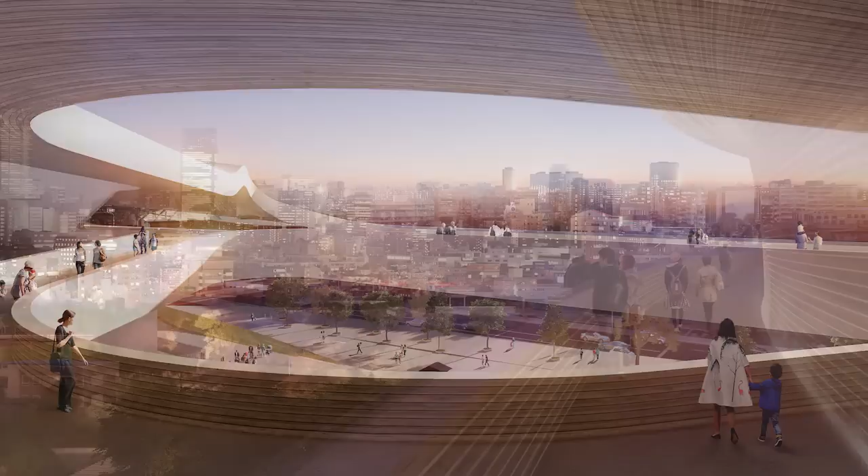One of the first shows we had done was in Japan 30 years ago. I think the stadium project is a very important project for Tokyo because that was done as an international competition, which we won. It was a very serious team of engineers and architects who looked at this project for 2-3 years, so it's an enormous investment.

I think it's a very important project because it has a life beyond the Olympics. It has a legacy life. The team is a credible mix of international architects with sports planning and Japanese experience.

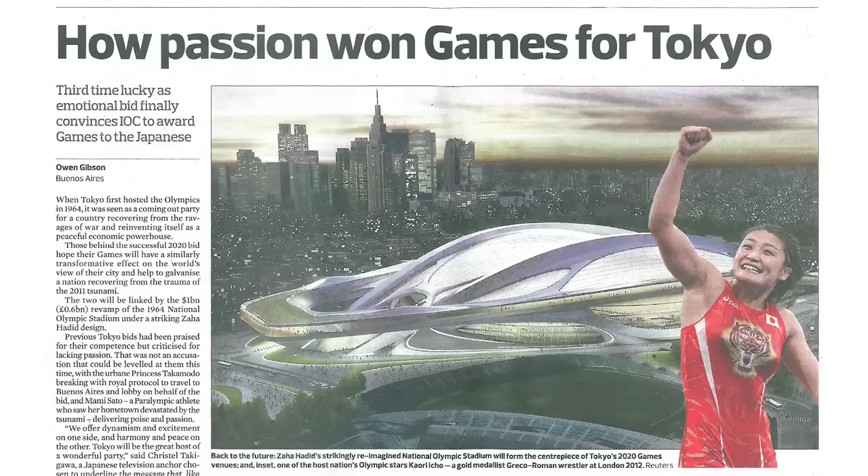Zaha Hadid Architects with Arup Sport won the international competition to design the new national stadium for Tokyo 2020 Olympic Games. ZHA have experience in working successfully with clients to design projects which have been built on time and to budget.

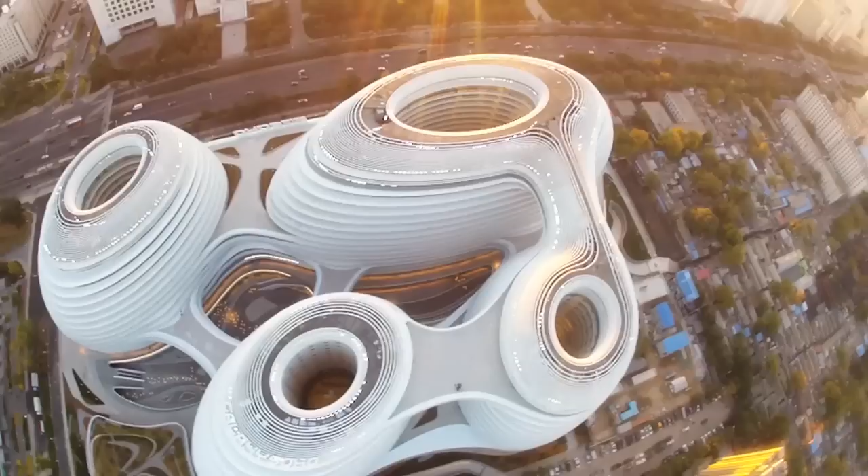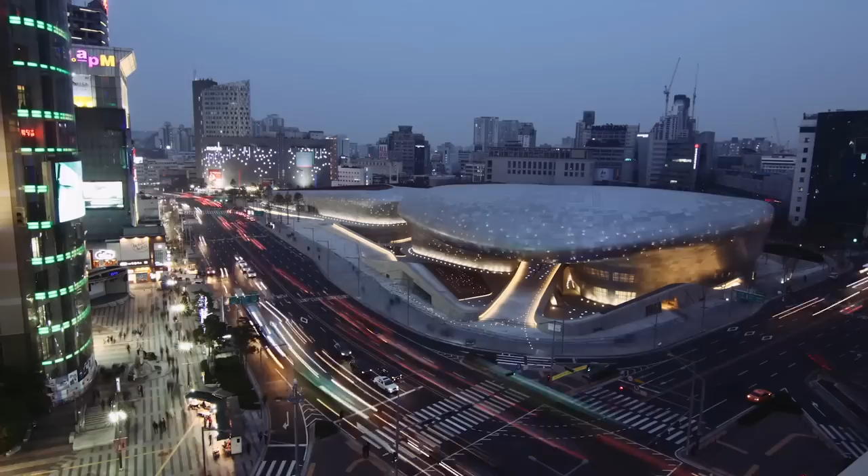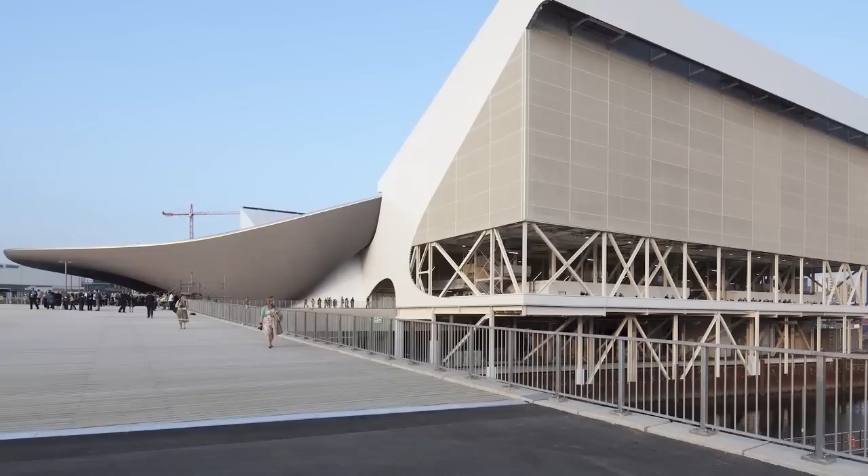ZHA designed the London Aquatic Centre for the London 2012 Olympic Games. The project was successfully redesigned to achieve a revised budget. The design used a mix of temporary and permanent seating to become one of the most successful venues of the London 2012 Olympic Games. The venue has since become very popular and well used by the public.

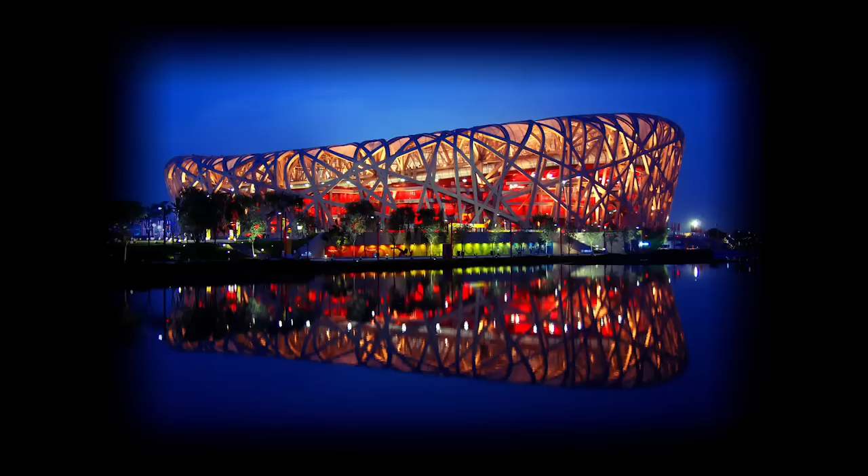Arup Sport have extensive stadium design experience, from the new multi-purpose stadium in Singapore's Sports Hub to the Beijing Olympic Stadium in 2008, the Allianz Arena 2006, and the City of Manchester Stadium 2002. We have been collaborating on the design with 4 of the largest design consultants in Japan, led by Nikken Sekkei. Between them, these Japanese offices have designed 3 of the stadiums for the FIFA 2002 World Cup in Japan.

The design was inspired by the past and future of Japan. The site is the site of the Tokyo 1964 Olympic Stadium, and it's an appropriate place to build a new national stadium which aspires to create a building which exceeds mere function to become a symbol of Japan's renewal and long-term optimism for the future.

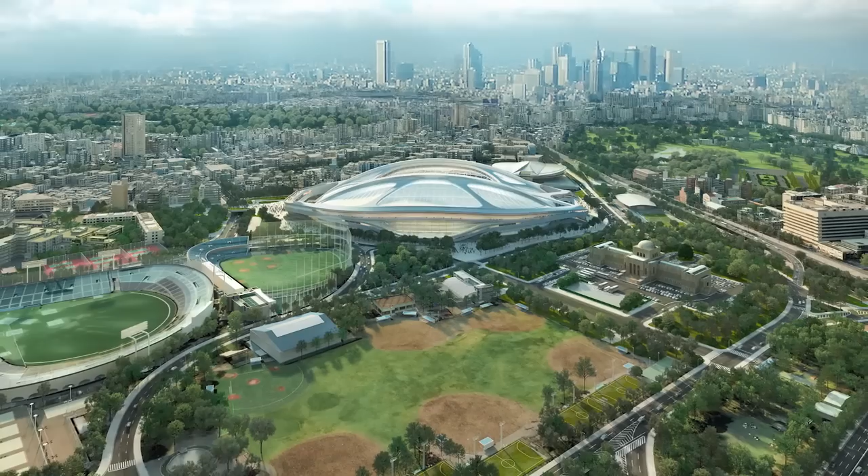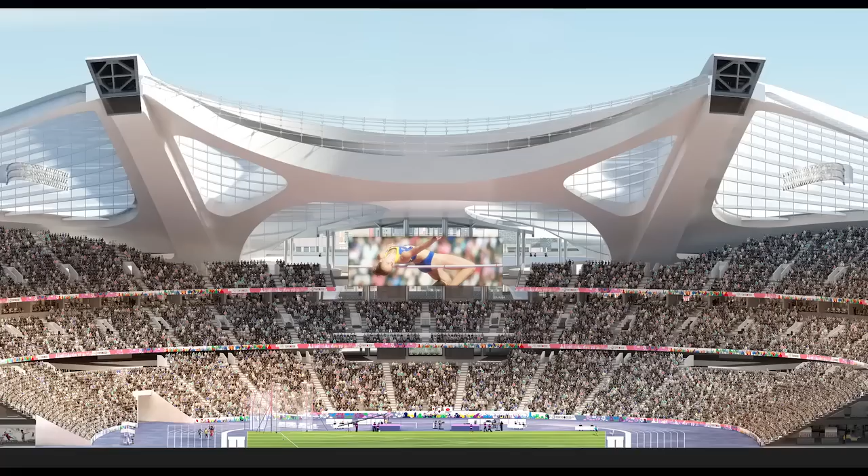The basic components of stadium design are extrapolated to connect the stadium to a specific context of Gaien and beyond, to Japanese culture, as an expressive but efficient design. The design is derived from the articulation of structure and circulation, where structure is required to create roof cover over long spans without columns, and a lot of circulation is required to safely move 80,000 people in and out of the stadium.

Proposed for practical reasons, the primary structure of 2 keel arches have a similar intent in silhouette and symbolism to traditional Japanese landscape bridges, so that the new stadium is based on a key motif from traditional Japanese landscape design, and an appropriate addition to the sports landscape of the Gaien area.

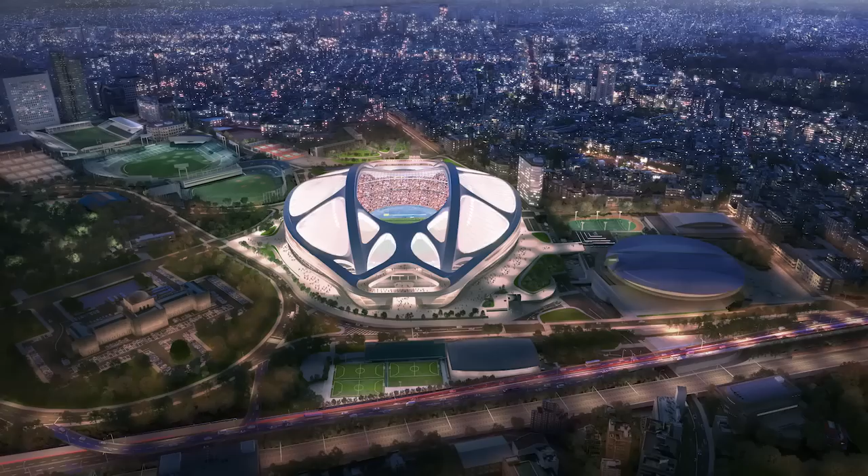With cross ties, nature is further embodied in the design, where the expressed structure creates a distinctive flower petal geometry, so familiar in nature and to the Japanese public who have a close affinity to nature and the passing of the seasons. The flower petal geometry of the roof is continued into the facade, where the structure is not only expressed but inhabited.

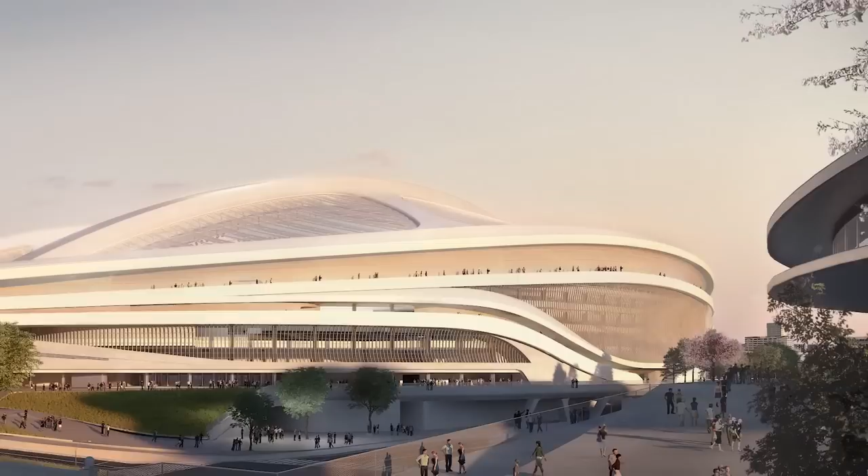A series of diagonal stairways and elevated walkways are developed into the envelope of the stadium, so that it functions as a stadium on event days, and every other day it's an extension of the pedestrian landscape of the Gaien area, allowing extended walks and elevated views over Tokyo.

All of these public walkways are lined with Japanese timber, giving a tactile familiarity to the stadium which ties it back to the fundamental material of the Japanese environment and experience.

The majority of facade is broken down by the petal geometry and clad in Japanese timber louvers, so that the overall effect at pedestrian level is a subtle interplay of Japanese timber cladding, giving the visitor the experience of a direct resonance to the tree-lined landscape of Gaien and Japanese culture.

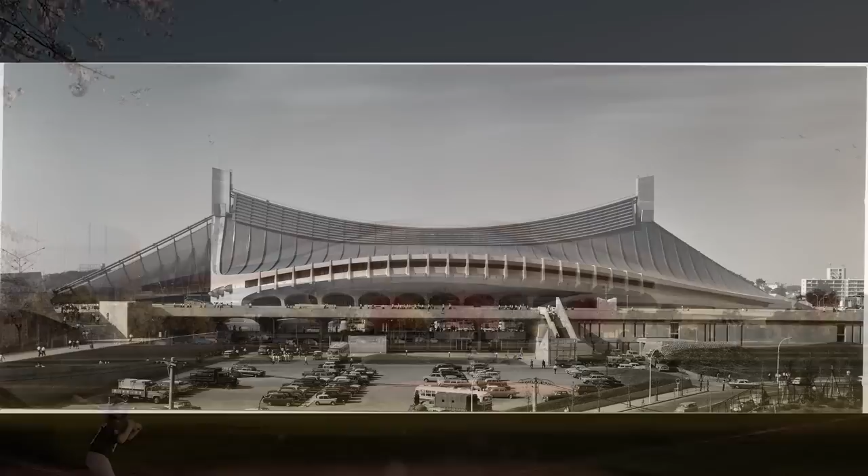The majority of the roof structure is provided by catenary beams, which resonate with the innovation by Kenzo Tange with his catenary beams for the Yoyogi National Gymnasium. We aspired to make the new stadium connect visually and symbolically with this Japanese icon of optimism, so that Tokyo 2020 leaves Tokyo with a stadium as well conceived and as beautiful as this gymnasium from Tokyo 1964.

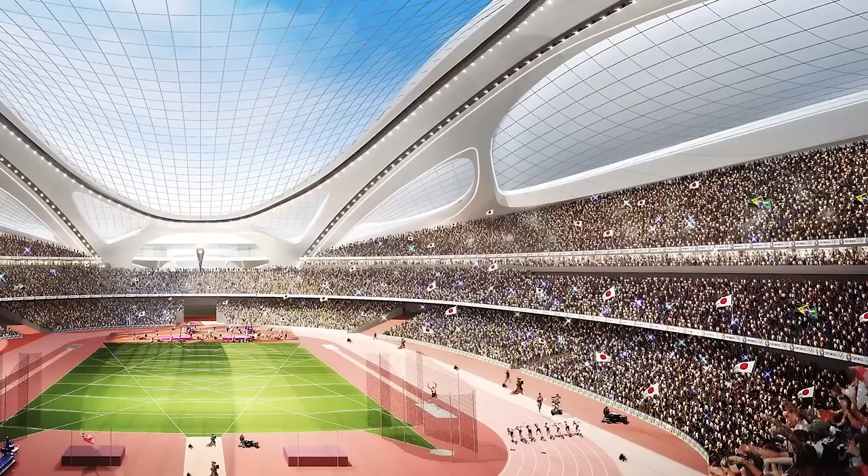The roof is covered in transparent, lightweight fabric. The roof allows daylight in, allowing good turf growth, whilst allowing spectators to experience the pleasure of daylight as they watch the events. At night, the stadium will glow and take on the appearance of a Japanese lantern.

Together, the arches, catenary beams, and lightweight fabric combine to create an overall effect that represents the traditional craft and modernist innovation of Japan, creating a renewal of the Japanese spirit of optimism for the future, based on confidence in their past.

Our new national stadium design has been 2 years in the making, and it is ready to start on site this year. It can be ready for the Rugby World Cup of 2019 and the test events before the Summer Olympics of Tokyo 2020.

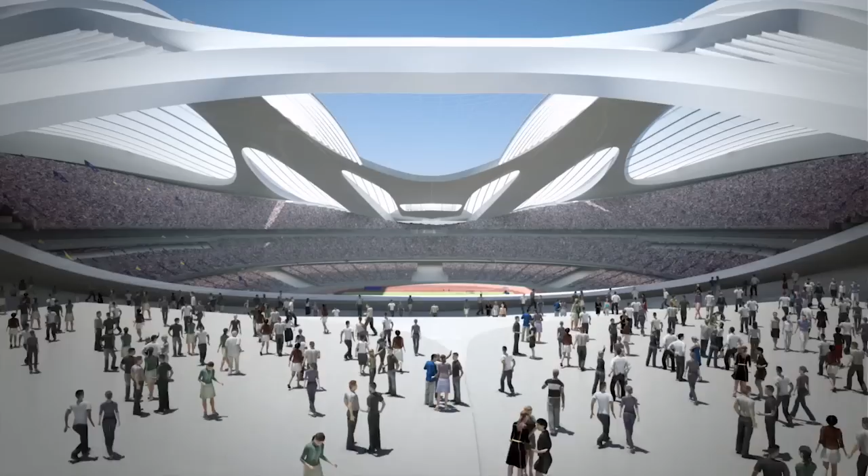To start the design from scratch is an unnecessary risk which we think the government should reconsider, if its aim is to achieve a lower price than 252 billion yen. We believe the answer is to introduce more competition between the contractors, but to not lose the benefits of the design.

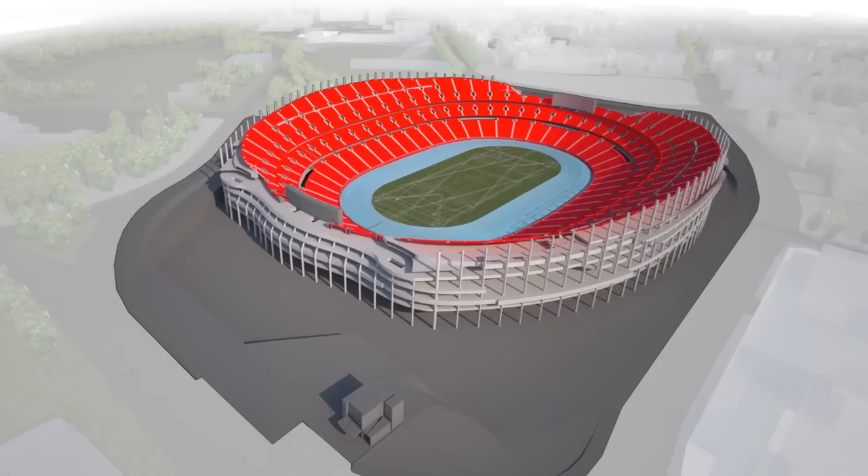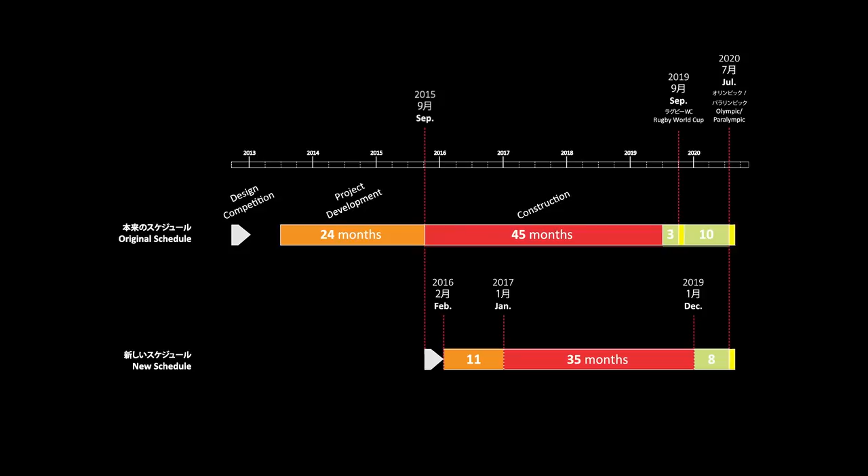The site is complicated, and the majority of the design will remain valid because the basic requirements of seating capacity and support facilities will remain the same. A new process should be used to get a lower price, but it should not waste the design work done to date. A new process will only allow a very short design period, and by the time certainty on design and price is determined, it will be too late. Instead, change the current design now to get certainty on costs.

A new process to find a contractor will result in the same limited number of Japanese bidders that competed for the project last year. Even if the tender is open to international contractors, only one of the 5 large Japanese contractors will be able to qualify or win the bid. We understand that there are only 5 contractors in Japan who will have the necessary stadium experience and size of turnover to qualify to bid for the project.

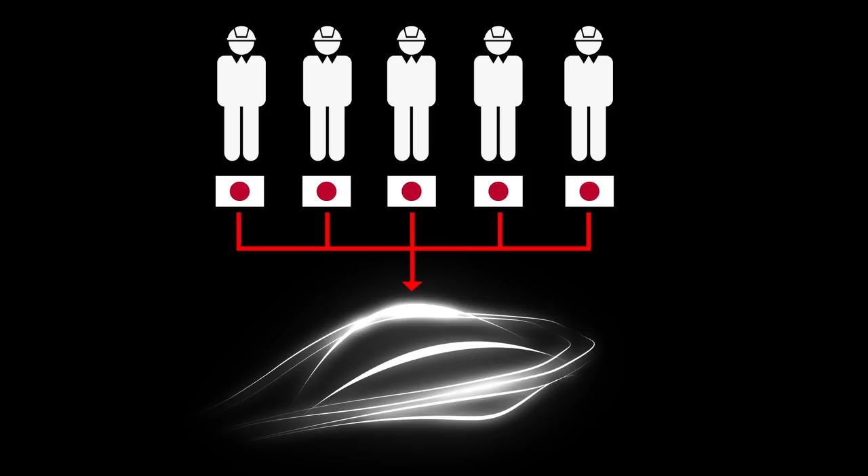2 of these 5 contractors worked on the project and produced the price of 252 billion. There is limited competition available, and this is the underlying issue to be tackled. We think the new process should concentrate on achieving competitive bids based on the existing design with the option to provide cost savings to achieve the project on time and on budget. This way, the design is not wasted and the risk of failure to get value for money is avoided.

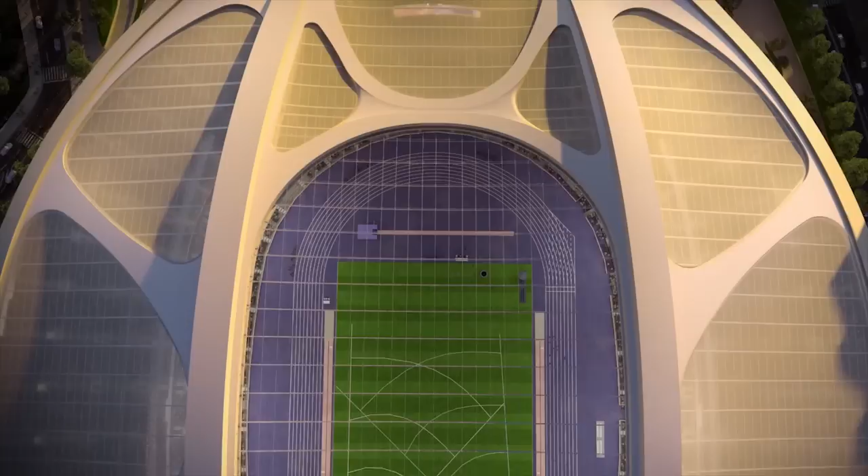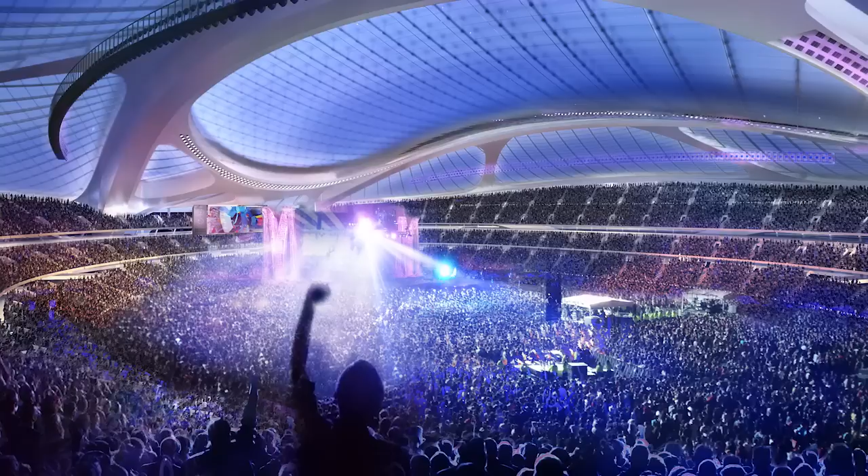The current design is defined by the client's brief, which is an outcome of their legacy business plan, which needs to generate revenue from key stakeholders such as the J-League. For the past 2 years, the client's brief was for a multi-purpose stadium with an adjustable seating bowl which is able to switch sports modes between athletics or football with an operable roof to close the roof opening and allow concerts.

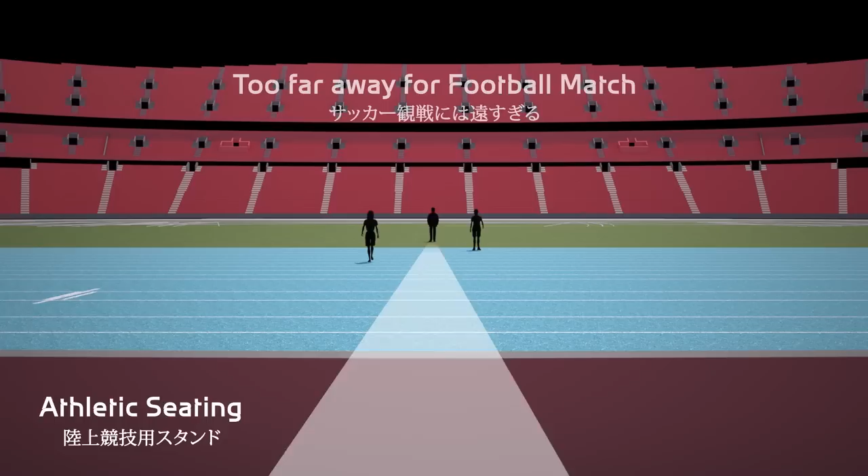If the government decides to change their brief to a fixed athletic seating bowl of 80,000 seats, it will not be sustainable. If football is watched from the distance of an athletic seating arrangement, it's too far away to create atmosphere and it will not be popular. An athletics formatted bowl is not acceptable to FIFA and will not be acceptable to J-League for national football events. To be sustainable, the investment needs to be focused on long-term usage after the Olympics, and that means being able to accommodate football, which will be the largest user and revenue after the 2020 Games.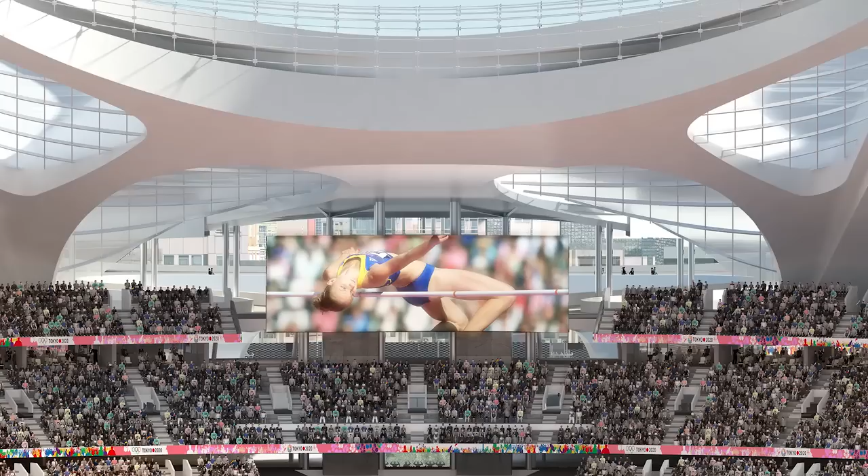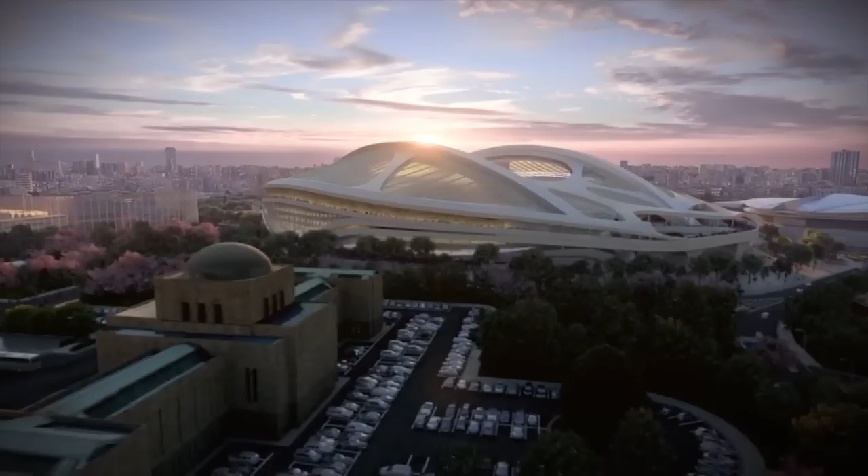There are many options available to achieve this objective, but there are certain key parameters to stadium design which we think need to be understood. To illustrate these parameters, we will use a cross-section of the stadium which encapsulates the basis of stadium design. It's important to understand that the size and volume of stadium enclosure is not only determined by the seating capacity. There are other factors which will need to be incorporated in the new stadium, regardless of its seating capacity. And these factors also determine the size, cost, and sustainability of the stadium.

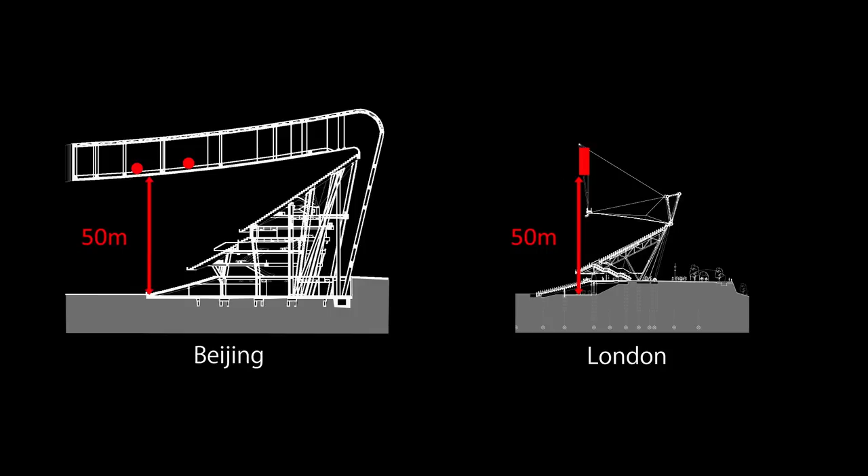To host the Olympic Summer Games, television requires high-definition lighting to be able to broadcast. This requires the stadium to incorporate lighting at a height of 50 meters surrounding the field of play. It's a large field of play with many track and field events occurring in different locations. Each of these events needs to be lit to the same high standard. The lighting also needs to work for football, which is a different and smaller field of play. This requirement means either above or below the roof, an extensive gantry needs to be built at a height all around the field of play. Regardless of seating capacity, this lighting is required.

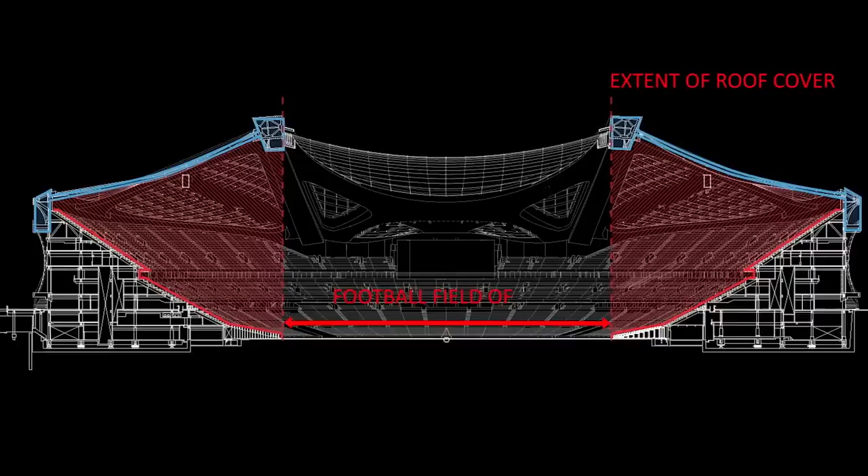The extent of roof cover over the seats is directly related to the amount of seats. Its fundamental purpose is to protect spectators from the weather. In the case of Tokyo 2020 Olympic Games, the weather is hot and humid, so the roof should provide as much solar protection as possible to make the spectators comfortable. If the stadium is to work for football, the extent of roof should be determined to cover all of the seating in football mode. Building a roof once to work for athletics and football will result in the best return on the investment and mean the stadium is sustainable in the long term.

Any stadium will host a limited number of events in any year, and stadiums are difficult to make work as a business. For the new national stadium, it was projected it would only host 40 events, including 10 concerts in any given year. There are potentially 80,000 customers at any event, so it's imperative that the stadium design maximizes the amount of revenue that it makes at each of these events.

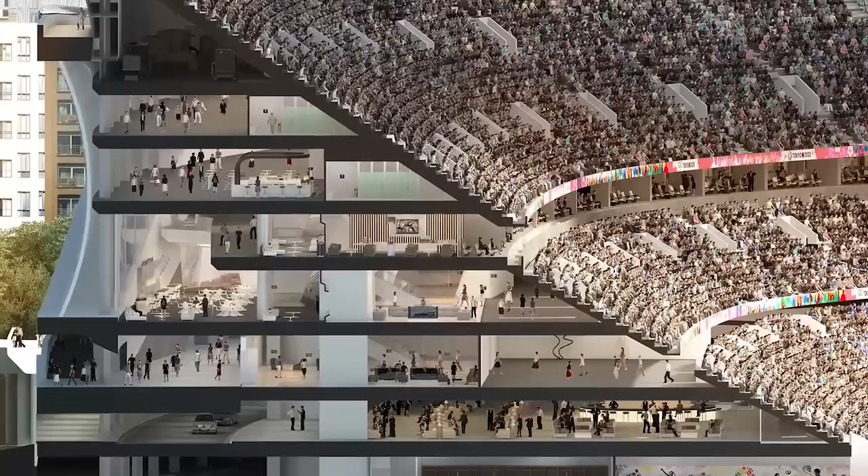In modern stadium design, this means more dining facilities within short travel distances to increase the duration of stay and spend by spectators to any single event. This means that in addition to the fixed seating, there needs to be facilities in close proximity to all seats to ensure revenue is generated. The current design is designed on this basis, and it should be retained to be sustainable not only in terms of usage but also revenue generation.

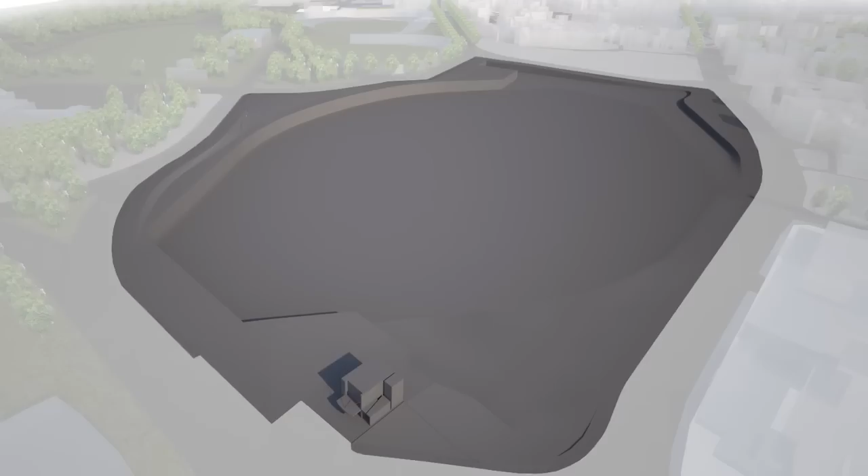The site is a very constrained urban island site, surrounded by roads on all sides with extensive level differences to navigate and height limitations for any development. The complexity of managing to fit the field of play and seating bowl on the site, along with arranging level access in multiple directions, means that there are very few design options available. Our current design is optimized for this particular site.

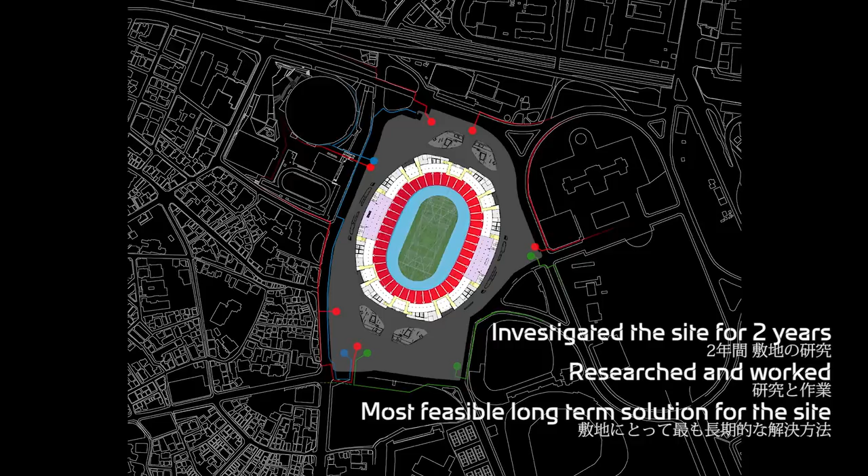Having investigated the site for 2 years, we have researched and worked to produce the most feasible long-term solution for the site. The site area is small, so the design has been optimized to create as much external precinct area available as possible for crowd flows by allowing the non-ticketed concourse inwards to create a compact footprint and safer site for crowd management.

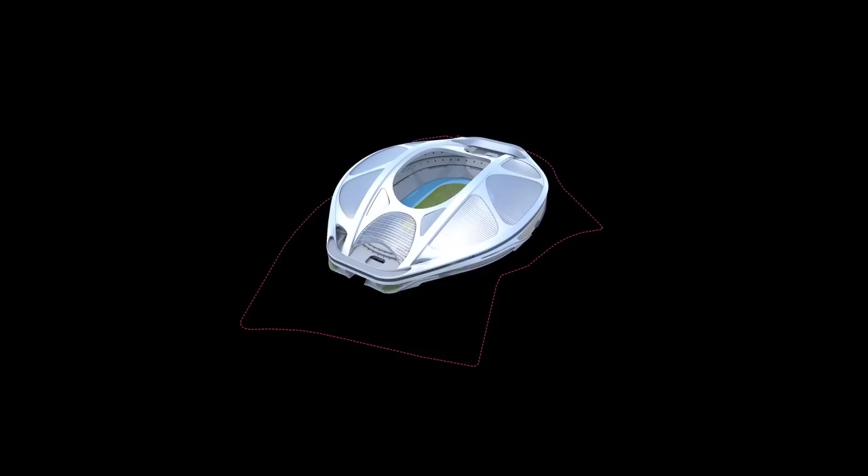We have tested many bowl options, including the use of temporary seating. We proposed an option in 2013 to the client to achieve some of the 80,000 seating capacity by using temporary seats. This option was rejected at the time, as the client's brief was and remained to have 80,000 permanent seats in legacy. We know from direct experience in London 2012 that mixing temporary and permanent seating on a constrained site is difficult, and it is not a way to save costs. It is a valid option if the long-term objective is to achieve a lower permanent seating capacity.

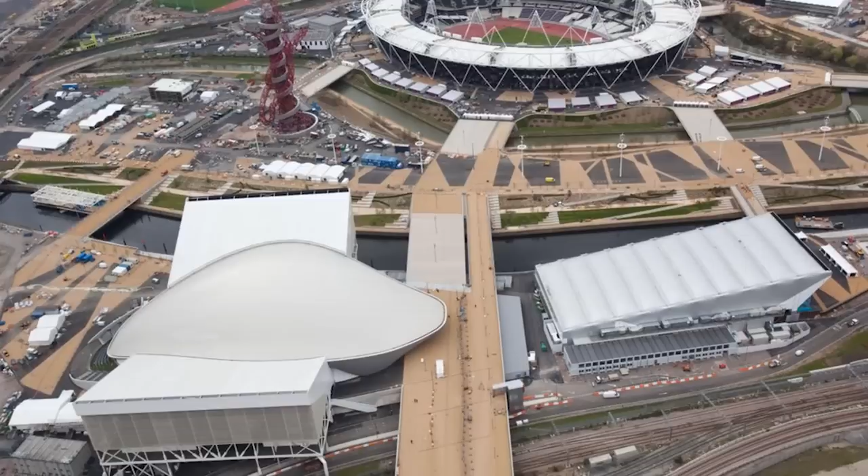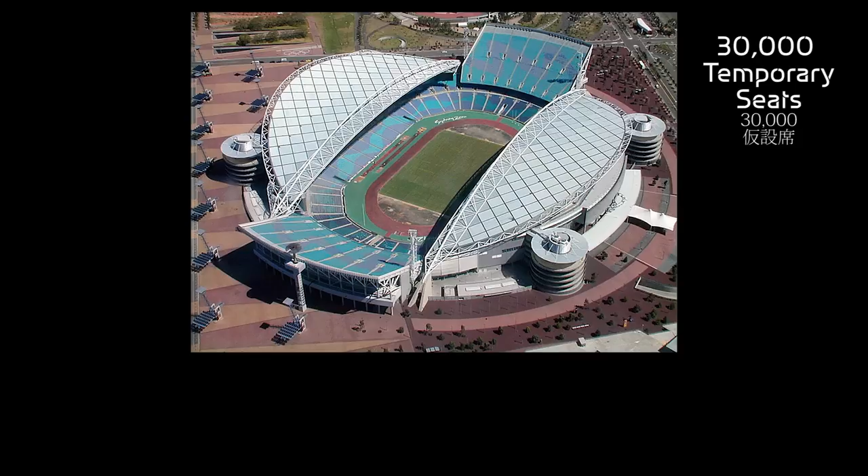This is the reasoning behind the success of the London Aquatic Centre, which was reduced from 17,500 in 2012 to 2,500 after the Games. The Sydney Olympic Stadium used 30,000 temporary seats. Although conceived as temporary, they were built to similar standards as permanent stands to achieve compliance with code. They took a significant percentage of the overall construction budget and took longer than anticipated to convert to the legacy stadium format after the Games.

We should learn from London and previous Olympics on the use of temporary seating. The reasons for choosing this option need to be determined not to save costs or time, but to satisfy the long-term business plan after the Games. The option remains possible with the current design, and the keel arches of the current design are similar to the structure designed for the same purposes in Sydney.

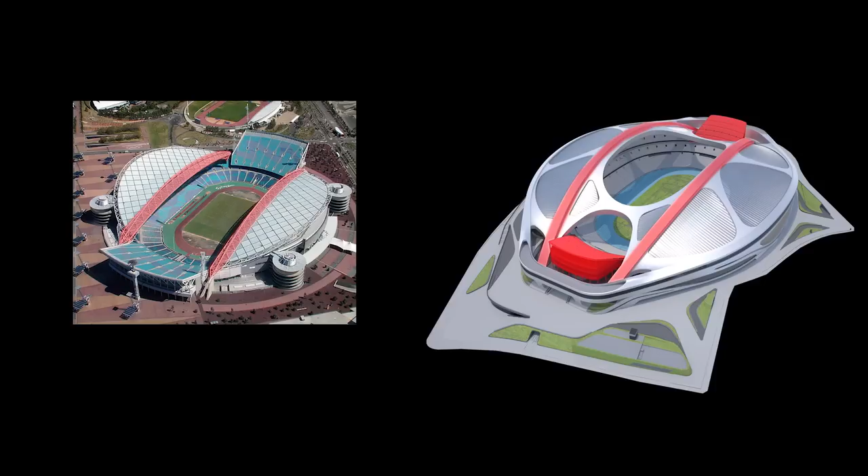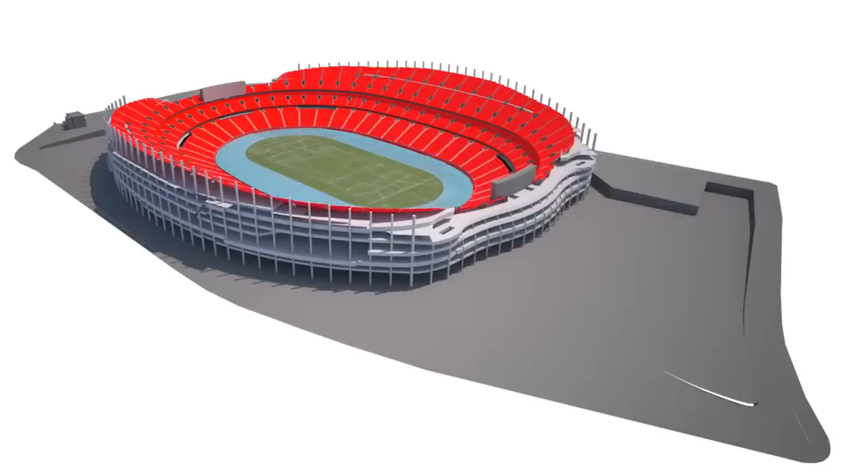We have developed the design to turn the requirements of the brief and site into benefits for the local community, Tokyo, and the nation as its national stadium. To start, and given the constraints of the site in size and height, we have produced the most compact bowl footprint possible for a multi-purpose stadium design.

Using Arup Sport's experience of previous Olympic stadium design, the design achieves a more compact design to fit the site, allow more space for safe passage on the precinct, whilst achieving better proximity to the field of play and better quality of view for all spectators by comparison to the previous Olympic stadiums of Beijing in 2008 and London in 2012. The compactness of the design has brought spectators significantly closer to the action in both athletics and football formats and provided them with an enhanced quality of view when compared to London and Beijing. The result is a very efficient, sports-focused stadium design which has been optimized for this specific site.

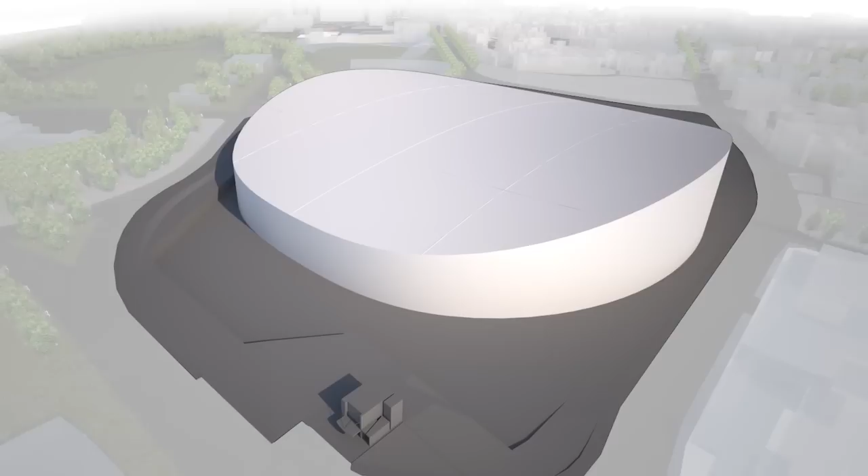We have been aware since our competition submission in 2012 of the sensitivity of the site location with respect to the size of the stadium. This is the reason why we proposed a saddle seating bowl as opposed to a flat-top bowl. A saddle seating bowl is shaped like a saddle, which means it's got a varying height, and its benefits are twofold. The first is that it allows the majority of seats to be positioned in the most popular location along the middle of the field of play and requires fewer seats at the ends. The result is more seats that are easier to sell.

The second advantage of the saddle bowl is that externally, the pedestrian perception of the stadium is much reduced, where the inclined elevation of the stadium comes down as low as 24 metres and rises to a height of 44 metres, so that from most viewpoints it will look and feel like it's lower. By comparison, a flat-top bowl would be a constant height of approximately 40 metres, which from all viewpoints will look and feel like a wall 40 metres high.

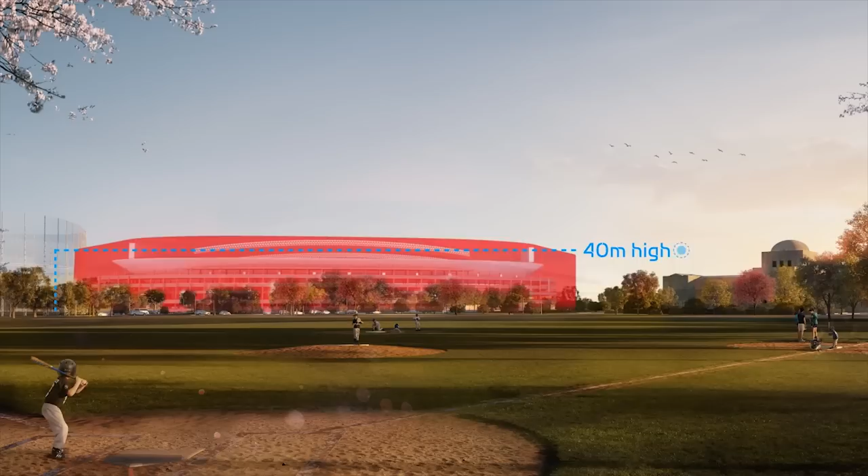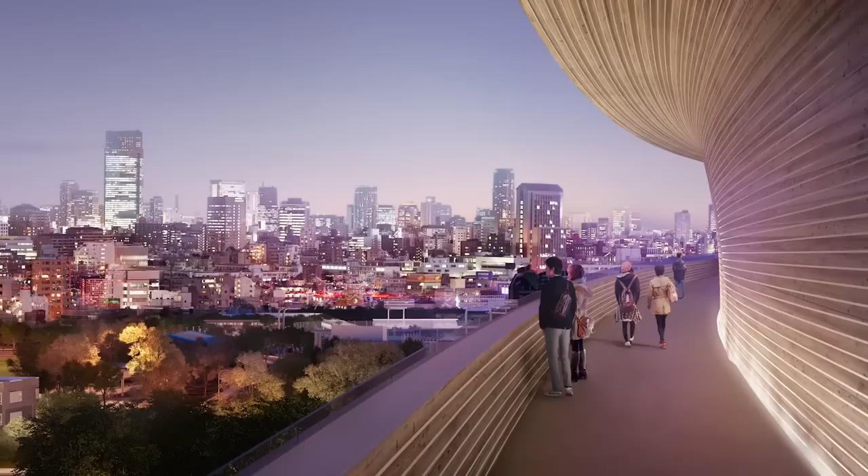The saddle bowl profile allowed the development of a unique additional public feature, the sky bridge. This feature of the design is not essential to the stadium functionality, but it's a gift to the public realm of Gaien. The sky bridge is an elevated walkway following the saddle bowl profile. It allows a daily usage of the stadium with elevated views, and it connects it into the daily walks or runs of the public in the Gaien area.

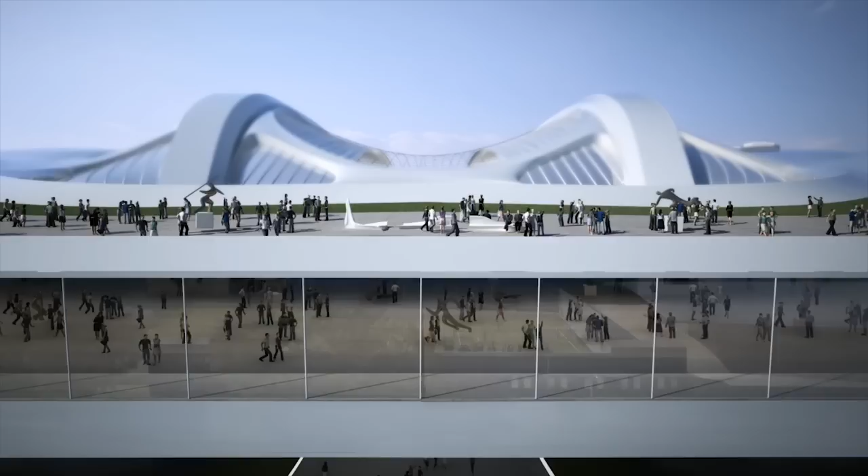The sky bridge will be open every day, creating more direct access with the stadium than its event schedule. It was intended to allow the stadium to become a more used part of the city fabric on a daily basis and more integrated into the promenade culture of the Gaien area.

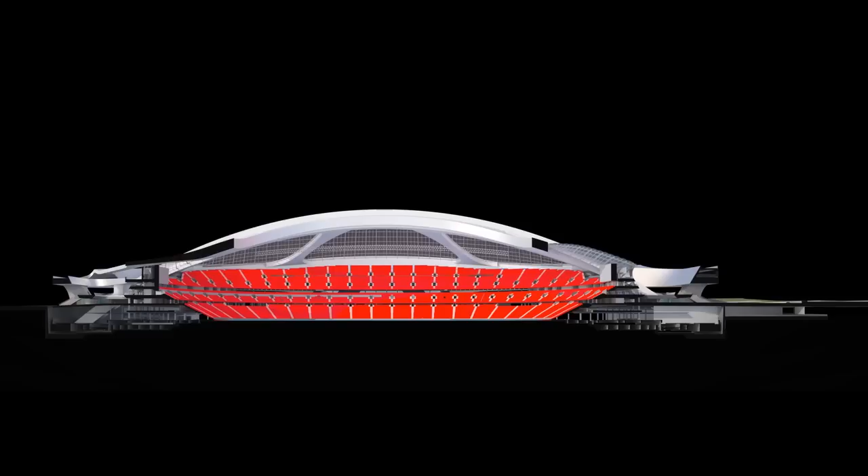With our experience of previous Olympic deadlines, it was clear that the stadium design should have advantages in saving construction time. We propose keel arches which span the longitudinal direction of the field of play, create column-free views, and rest on the ground. As they rest on the ground, it means that the arches can be built in parallel to the seating below.

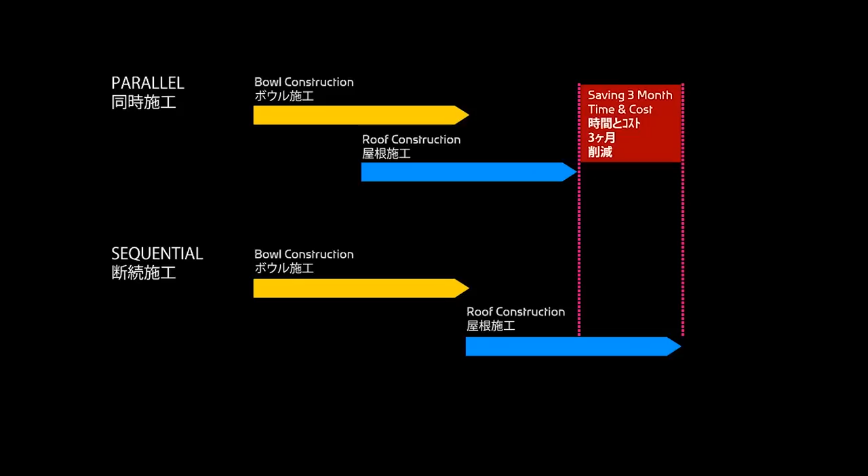We believe this approach will save 3 months in construction time compared to a sequential build of bowl first and then the roof. This time saving will be critical in achieving a fixed deadline, and it will have cost-saving benefits as well. This design benefit did not materialize in the joint venture bid, but it remains possible under a new bidding process. The efficiency and cost of the keel arch design is possible to measure by comparing its tonnage to other stadium roof constructions of similar span lengths and seismic conditions as Tokyo. We undertook these studies, and the keel arch is an efficient and cost-effective solution with many benefits.

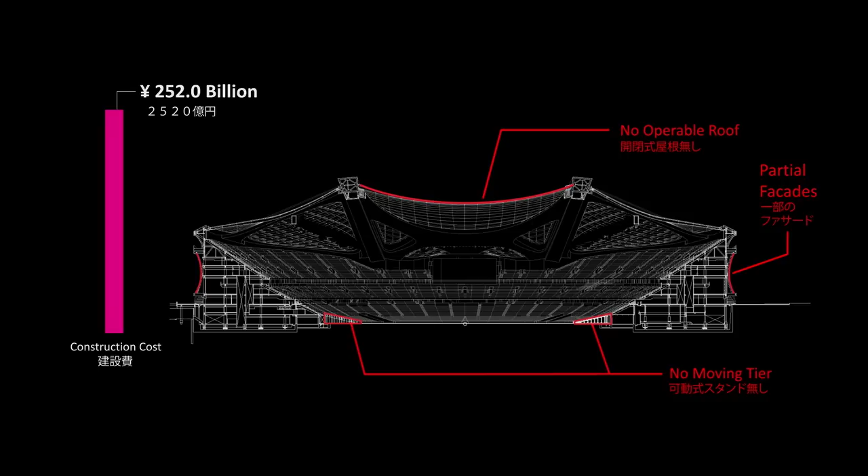Before defining a new budget for the stadium, the current price submitted by the contractors should be better understood. It was not the price of the design as we have described. It was a price based on considerable omissions from that design. The price of 252 billion yen did not include the operable roof, nor the moving seating tiers, and only a partial enclosure of concourses. It was therefore already the market price of a fixed athletic stadium of 80,000 permanent seating. Save for the sky bridge, 252 billion yen is the current price in Tokyo for a basic 80,000 stadium on that site. A new process needs to change the market conditions in Tokyo, not the design.

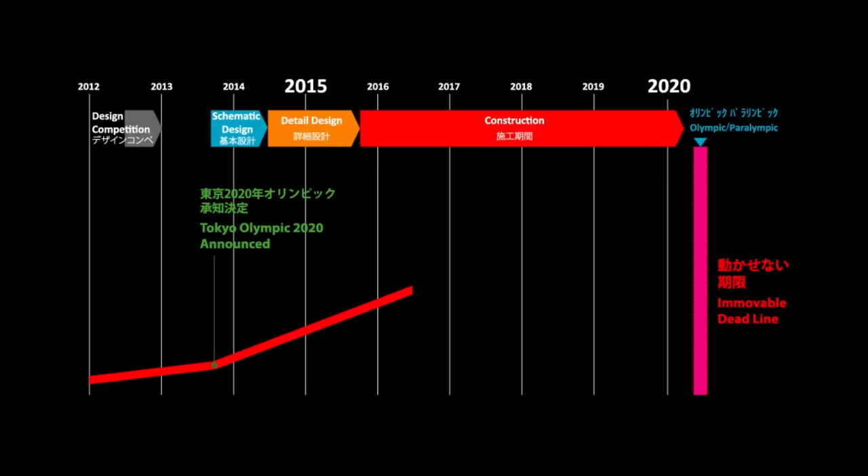It should also be understood that the immovable deadlines, such as the Olympics, combined with a limited competition in the marketplace, create inflated prices. The determining factor in the price is the market and the demand on materials and labor. The design is not the determining factor in these circumstances. Rather, the design should be seen as the only way to achieve value for money in the market. Without a design as a contractual commitment as much as time and cost, there will be considerable risk to achieving value and return on the investment.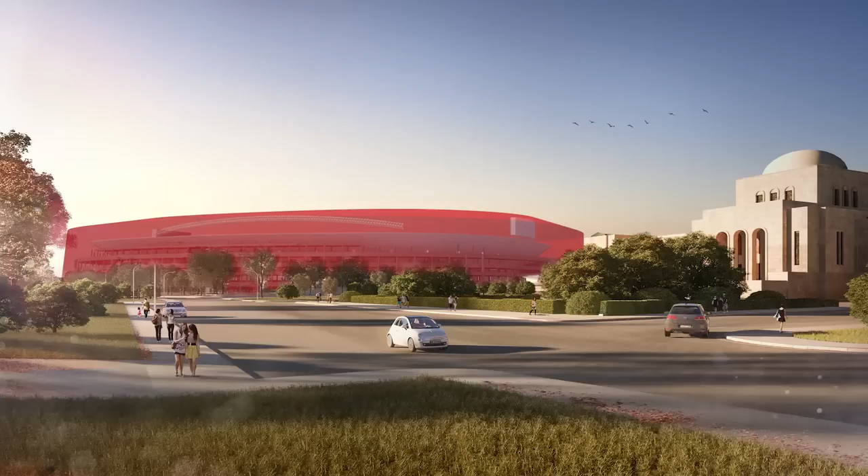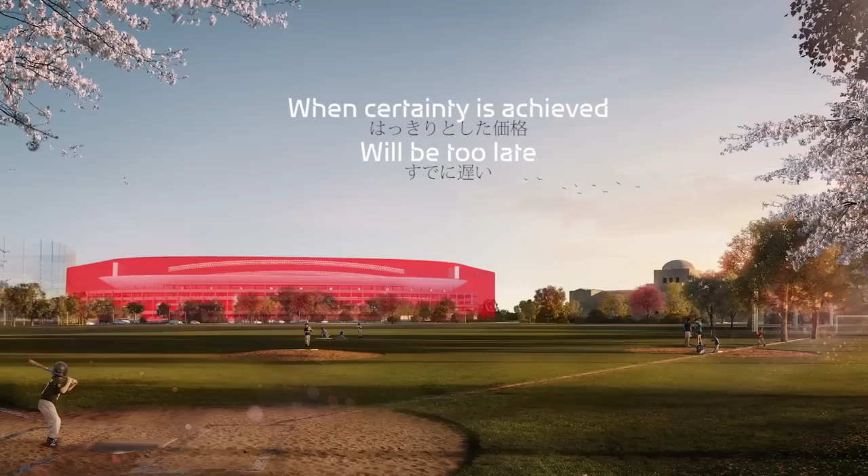The current design can be redesigned to achieve a lower budget, but it should be retained in principle so the Japanese public achieve this value from the market and they get a long-term return on the investment. Giving the design responsibility to the contractors means that there is no real definition of value or quality except for a price and time schedule. A new concept design submitted with a price cannot be trusted after 5 months of design work. It takes much more time to determine a new design with complete price certainty, and by the time that certainty is achieved, it will be too late. The Japanese public will get less for their money with this approach.

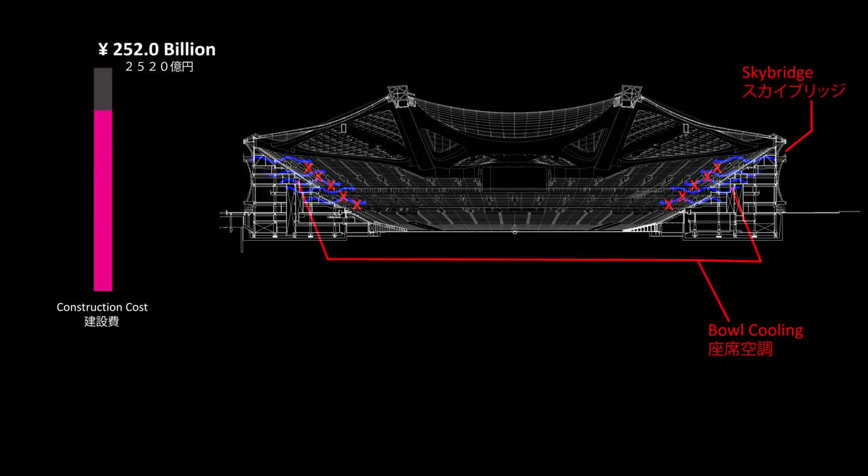So why take the risk? There is a design which will achieve quality, and it can be changed to meet a new budget. Why risk everything when outcomes are so uncertain? Further cost savings can be considered, such as omitting air conditioning for the seating or omitting the sky bridge. But the stadium design is compact and efficient. It cannot be improved upon unless the fundamental criteria of seating capacity alter or a more competitive bidding situation is created to lower the price.

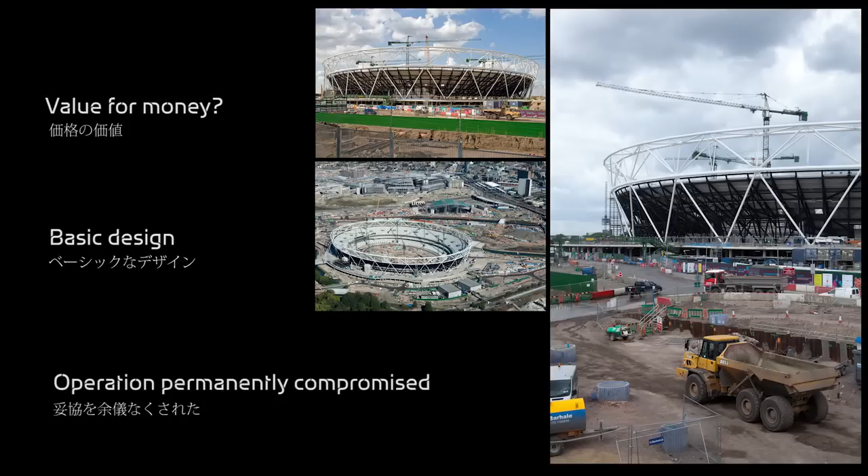Tokyo should learn from London 2012 and its 2012 Olympic Stadium. The London Stadium was design and build. As a comparative cost to the 252 billion yen price for the Tokyo Stadium, it cost 218 billion yen. No one can think that the London Stadium represents value for money. The design is very basic and the operation will be permanently compromised by its conception. It was built in 2012 as a fixed athletic stadium with 80,000 seating. The upper tier of 55,000 seats was supposed to be dismantled afterwards, so all facilities were placed on the ground with long travel distance. This mode cost 138 billion yen.

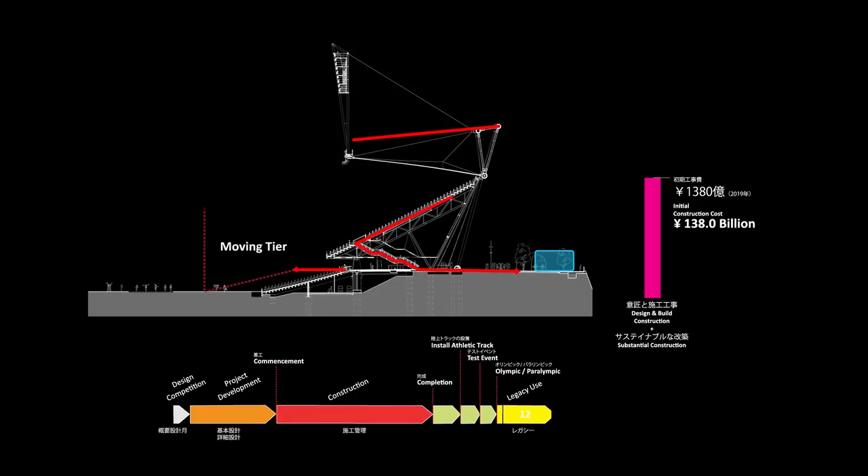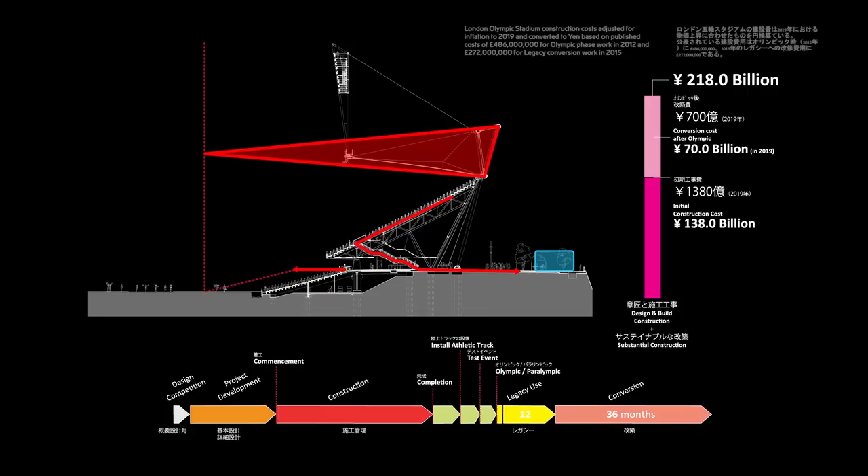After the Olympics, to make it sustainable, it needed to be modified to work for football. So a moving tier was introduced, the roof needed to be extended, all of the steelwork needed to be re-welded. These amendments cost a further 70 billion yen, taking the total cost of the London Stadium to 218 billion yen. And it will remain a compromised stadium, designed only for athletics and adapted retrospectively to accommodate football. In football format, it will never generate the intensity of a true multi-purpose stadium bowl, and the extended travel distances to facilities from the upper tiers will make these seats hard to sell.

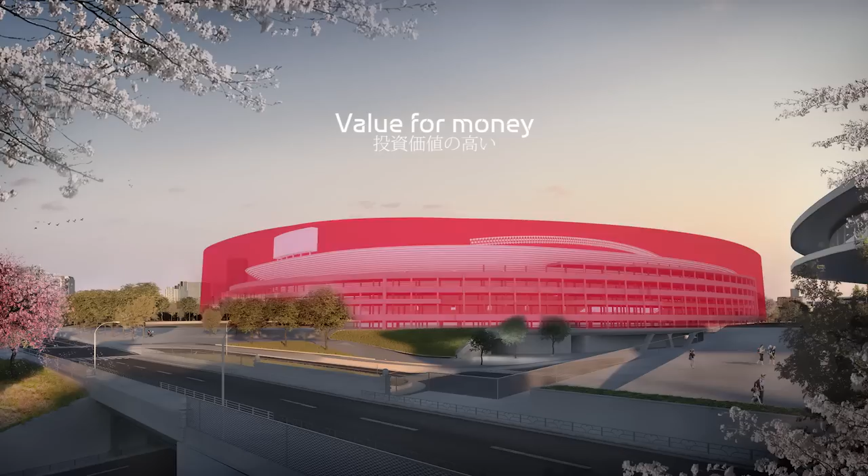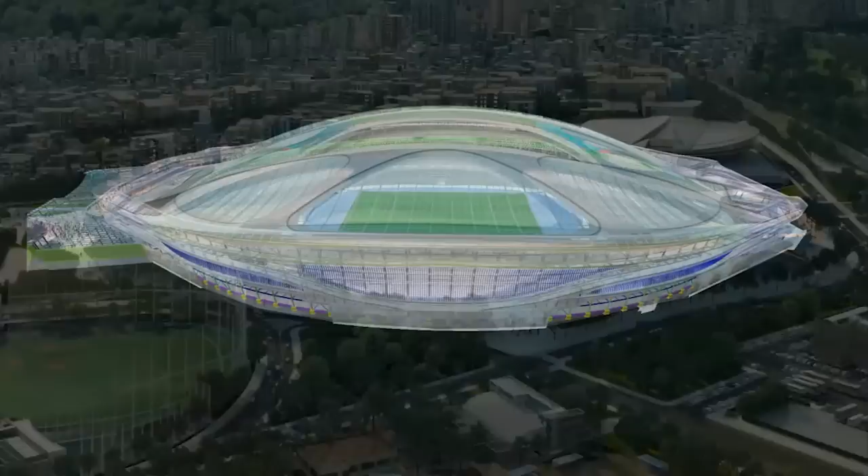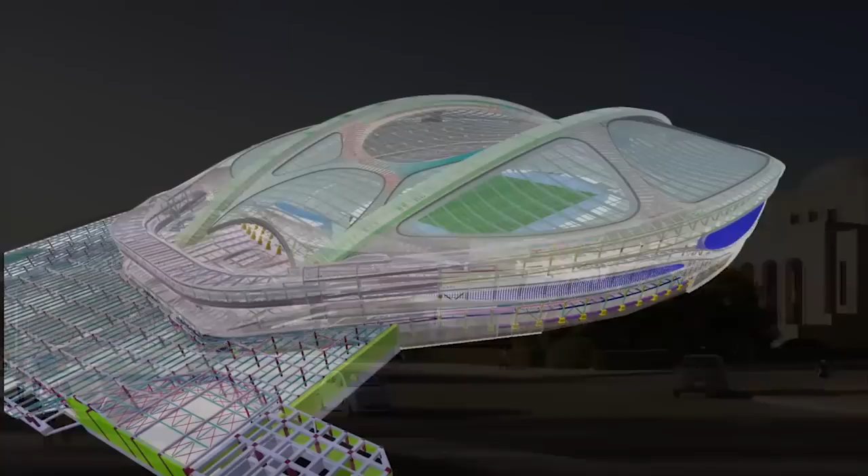Tokyo should avoid these mistakes and use the current design to achieve long-term sustainability and value for money from the market by using the design which is efficient and adaptable to change. We understand the need for the government to undertake a new process to get a better price, but it should not take an unnecessary risk on the design, and it will get more for the taxpayers' money by retaining the current design. It is a unique design which has been thoughtfully developed over 2 years to be not only beautiful, but compact and efficient for this specific and special location in Tokyo. The current design encapsulates all of the lessons learned from our direct experience of other Olympic stadiums. This knowledge and experience should be retained so that Japan gets a stadium fit to be called its national stadium.